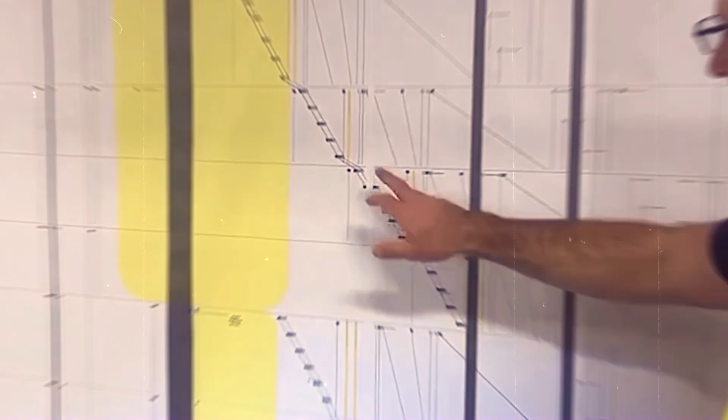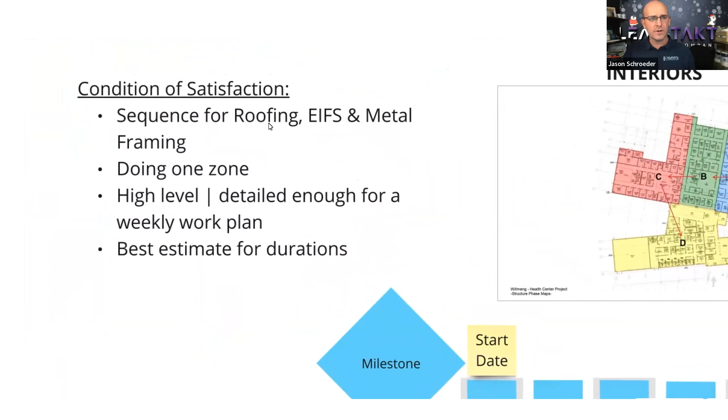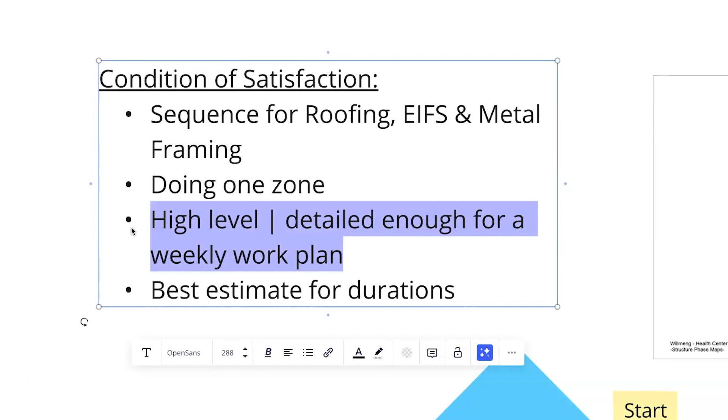Number one, the first thing that we have to do is explain to people on the pull plan, what are the conditions of satisfaction for this pull plan? So we pre-populated this. It looks like we have in here the sequence for the roofing, EIFS, and metal framing. We're going to do one zone. It'll be kind of high level, detailed enough for a weekly work plan, meaning enough for you to detail out your activities. And we want the best estimate for your duration.

So we're going to decide on zoning first. Then we are going to fill out our activities. Then we're going to run a backwards pass. And so these rules are here for us to say, hey, we're all on the same page with how we're going to run this pull plan. So the colors for the pull plan will be the LeanTakt purple, Willmeng blue, roof activities are green, EIFS is orange, and metal framing is the light blue.

Here's how we're going to do the stickies. I'm just going to do duration, activity, and that's all we need for the activities when we do our forward pass. When we do it backwards, I'm then going to ask you, what do you need to have happen out ahead of you for that activity to take place? So as we do the sequence forward, we're just building a sequence. But as we go in the reverse, we're going to make sure that the sequence is filled out based on not just the sequence, but the things that you need to do that activity.

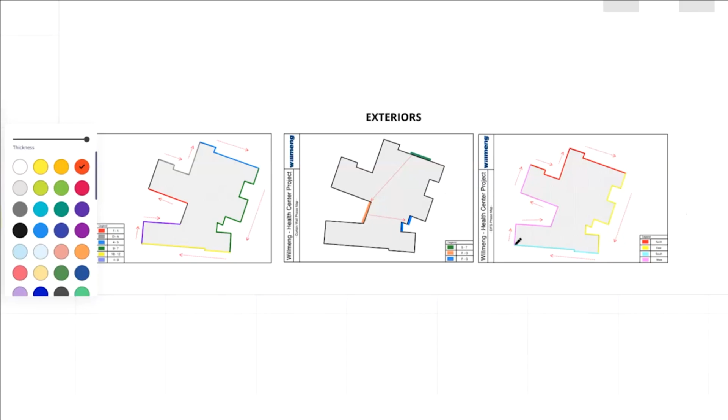We're looking at the EIFS phase map. It looks like we have 4 proposed zones. For the curtain wall, it looks like we have 3. And then for the EIFS, it looks like there's 1, 2, 3, 4, 5, 6. Is that correct? Yes. And then those probably tie together on the takt plan. These 2 zones probably correspond to this one. And these 2 zones down here probably correspond to just this one. And that's how you overlap them with the other work.

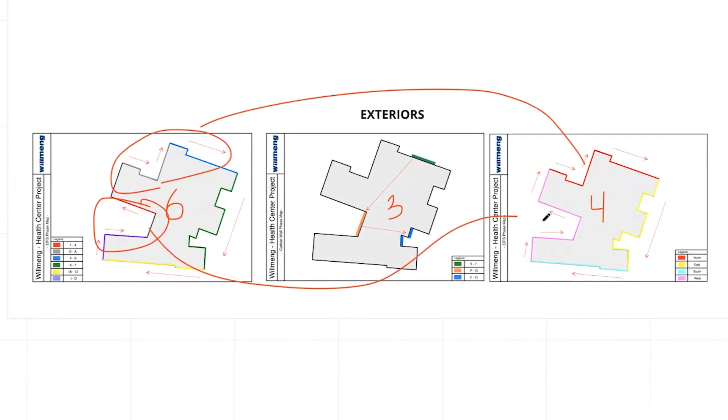All right. And then for the roof, it was broken out into these general areas because of height. So what we need to do is just do a preliminary check. And so I'm going to go one by one on these. So EIFS, this is our first zone for the foundations and structure. This is our second zone generally, and this is our third zone. Our interiors and structures progress is happening in that direction. So based on that, from a preliminary standpoint, I'm assuming, Ricardo, that the red would be the first zone, and then would the yellow be the second one?

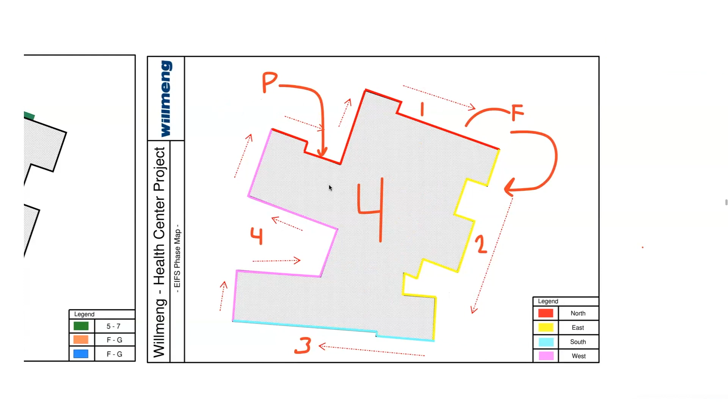Correct, yeah. Third and fourth. What we're saying by zoning is that you would plan, build that zone or that run of exterior, and then finish before you move on to the other zone so that another contractor can come behind you if need be. So all we're asking is, if we broke it out into 4 zones, would that work for you to plan your work, build it while you're there, and finish before you move on to other zones in your work?

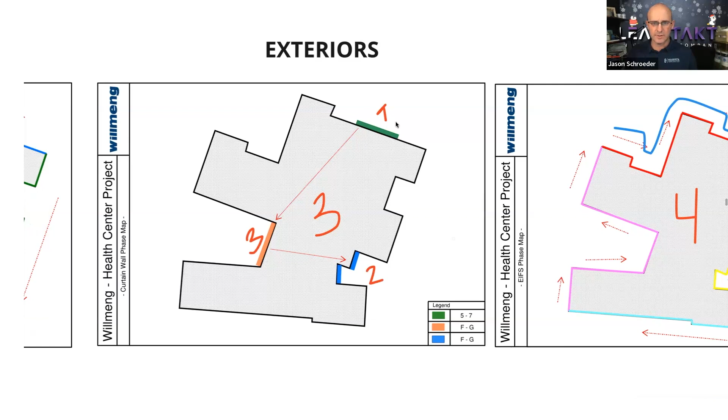Yes, it will work. Everything here in blue, you'd like to scaffold that all at once, is that correct? Yes, if possible. Okay. We're going to frame everything off of lifts and hang everything off of lifts. So you'll be inside. Lifts off the outside. Going over here to curtain wall generally, if I understand this right, it would be the first install, second install, third install as we run around the building. Okay, so we don't need to do this one right now. The smaller the zone sizes we go to, the faster we typically go in the overall schedule. We like to keep options to where we could maybe later on make them a little bit smaller.

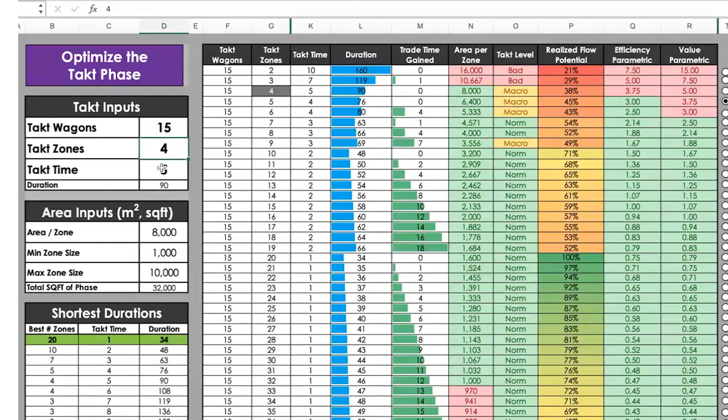This right here is a calculator. Takt wagons over here to the left, you can consider those general activities, like large scopes of activities. Let's say that on the exterior you had 15 major activities and we have 4 zones, and let's just say the general duration for the activity was 5 days. So we have 15 major activities in 4 zones on a takt time of 5. What I want to show everybody just real quick, when you look at the numbers here, what that means.

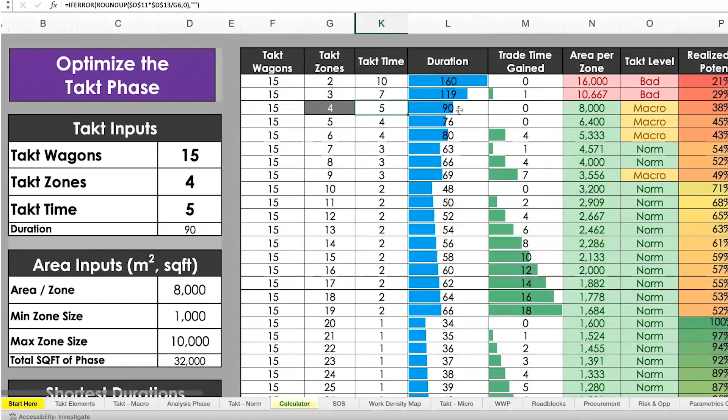If you did have 15 major activities, which we'll find out now, 4 zones on a 5-day takt time, the duration of the exterior install would be 90 days. If you changed it to 6 zones, it would go down to 80. So this column right here calculates the overall duration of what happens if you do different zoning strategies. So I think we'll start the pull plan out at 4 zones, a little bit on the higher end.

And if this project ever gets into trouble and we hit a delay, I'm thinking we could always go to a 6-zone strategy to pick up time. Matt and the LeanTakt team, does that sound okay to you all? Am I heading in the right direction with that?

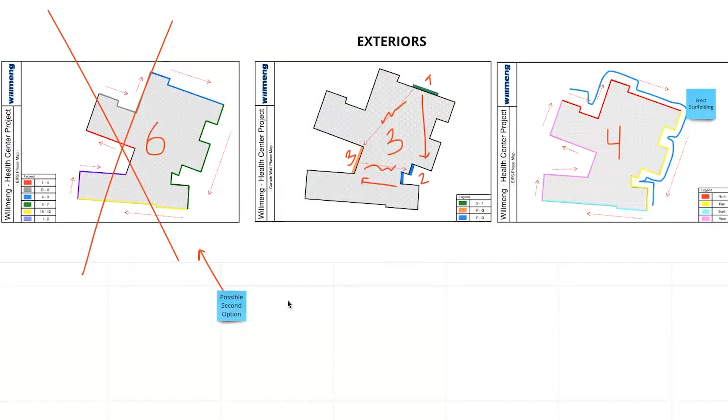I do want to make something clear. This 5-zone strategy is the same amount of work, same labor counts, same material amounts. The only thing that's different is the zone sizes, and the only other thing that's different is that you need materials sooner because you're accomplishing the work sooner.

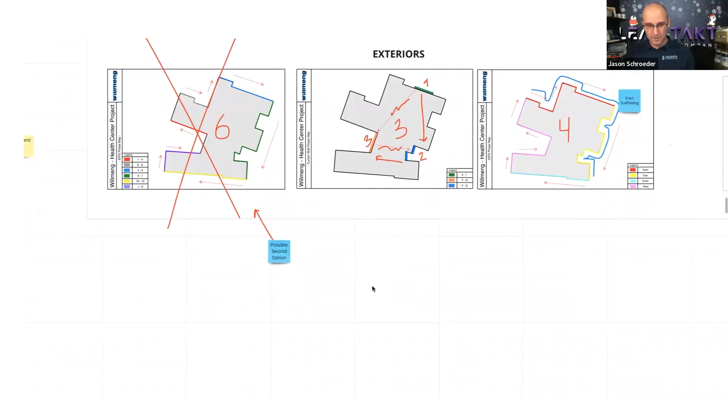Perfect. Wonderful. All we're trying to do with different zoning strategies is have a way to pull the schedule in if we ever need to that does not hurt you. So yeah, that's all we're looking for. My point with this is that I think that the 4-zone strategy could be our default, and then the 6 zones, if we ever needed to, we could go smaller as a backup and recover from a delay.

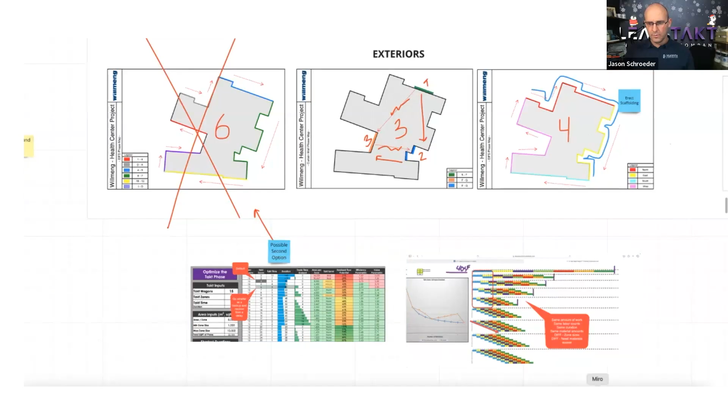When you go back to the calculator, I just wanted to show you what happens here. If I said, hey, let's go ahead and do this 6-zone strategy and hit this button, if you ever wanted to do this and check the general contractor you're working for, this calculator is free on LeanTakt.com. But what you can see here is that if we had 4 zones, this is what the duration would be. And if we go to 6 zones, you'll see what it looks like down here and where we gain those 10 days.

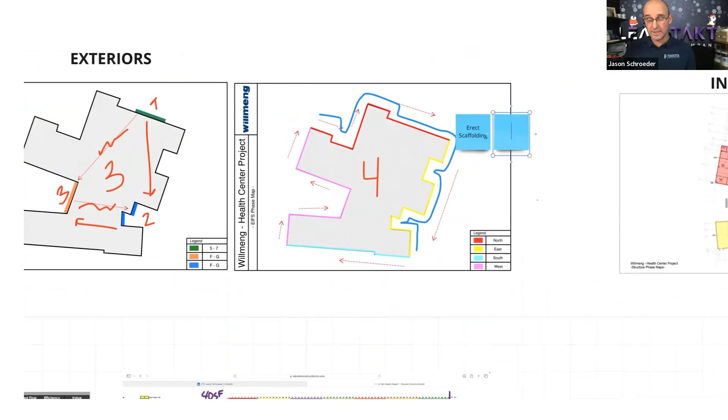Okay, so we're set. We're generally going to do 4 zones and we're going to erect the scaffolding. Let's maybe just get right into the exterior and let's do our pull plans. We are only going to pull plan 1 zone. We're going to come up here and we're going to create a sequence just for the red. And what I'd like to do, just high level, what is the general phasing of trades? Is it framing, sheathing, EIFS?

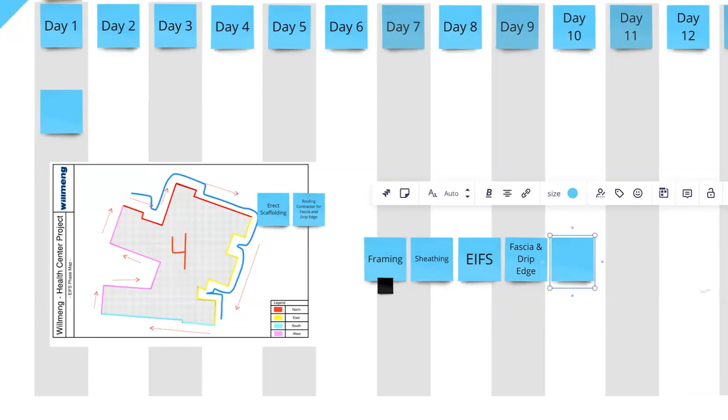The water barrier is a part of the EIFS process, is that correct? Yeah. Then you have fascia, drip edge. And then are there any windows or curtain wall that go in after the EIFS? Yep, they all do. Okay, windows and curtain wall. So this is our general high level sequence. So I'm just going to use this as a guide. All right, well, everybody get ready. We are in our pull plan right now.

For the framer, what do you expect when you get there? I just need all the decking shot down, and any duct openings or anything in the walls laid out before I get there. That's going to be your conditions of satisfaction. All right, once you get there, just for the red zone, what's the first thing you do, boss? Well, I got to lay it out and then shoot down track. Okay, how long does layout take? Oh, it'll probably take me a day or 2 to lay it out.

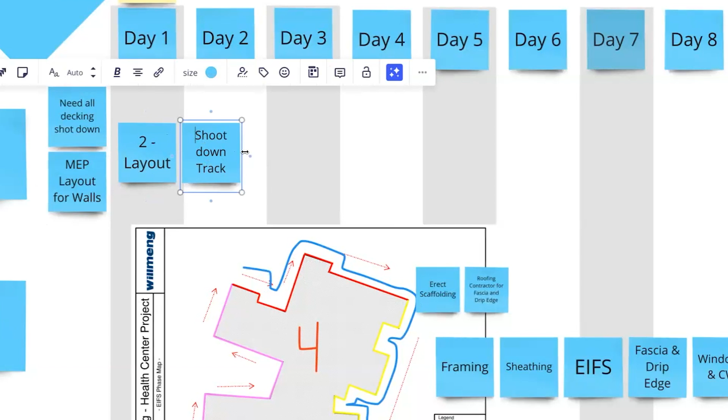Okay, just for the red zone, right? Yeah. And then shoot down track. Is that bottom track and top track? Yes. How many days? Probably 2 days of shooting track and then 6 days of framing. So 10 days total. All right, what happens after framing, team? Sheathing. How long for sheathing, my brother? And is there any overlap? 7 days for that area. So once sheathing's done, EIFS, is that you next? Yes. Tell me what you got.

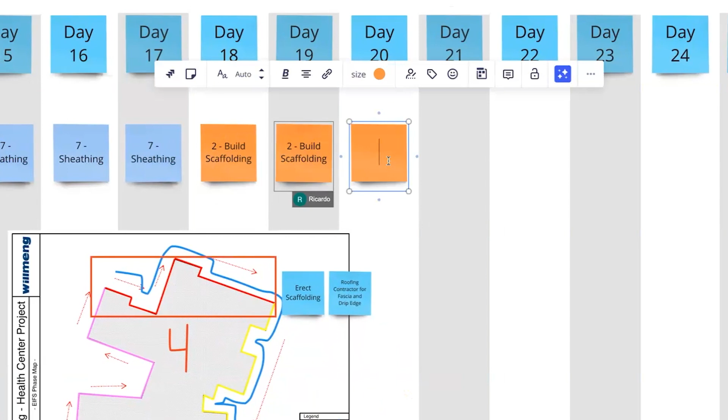What is your first step in your process? Scaffold. It'll take me for that probably 2 days. And then what happens after you build scaffolding? Weather barrier. How many days? 2 days. Envelope testing. Yep. Okay, and maybe it's just an inspection, either one.

And then actually, before I forget, you probably have to do an inspection after framing and sheathing. Is that right, guys? Yep. What happens after your envelope testing and weather barrier? Start sticking foam. All right, how many days for that? I'll say in the elevation 2-3 days. Okay, 3 days. All right, what happens after that?

That's rasping. How many days? 3. Okay, perfect. What happens after that? Base coat, mesh. It's gonna take me 2 days. What happens after that? Color, say 2 days max. Let's go over to the roofing contractor.

So the roofing, give me a roof color, LeanTakt team. How many days do you need to do your fascia and drip edge? For fascia, just that zone, 4 days, 7 days with drip edge. And does it overlap or is it just... Yeah, so we're gonna do about 150 linear feet of fascia, then follow it up with a drip edge.

I'm going to do something here real quick. Is that kind of a representation of what you're doing? Yes. All right, how many days does it take to drop scaffolding? 2 days. A couple days, okay. I'm going to lock all of the background and I'm going to copy this over and look at, is there an ideal rhythm from area to area?

So this is always how pull planning was supposed to go, is we were supposed to make sure that we have the right stagger from zone to zone to zone. So I'm going to do something that might look just a little bit haphazard, and I'm just going to start to look for patterns. So the sequence that we just created, I'm just going to bring out some data. When we do pull plans, in my opinion, it doesn't really matter how well we're flowing left to right, because that doesn't take care of trade partners. I care how are we flowing from area to area to area so that the trade partner has flow.

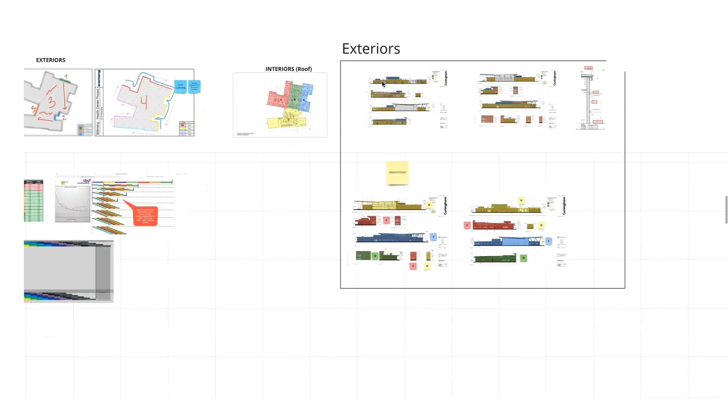Okay, so I'm just going to check a couple of these things off. So we have the EIFS, so I'm putting check marks on anything that we've included in our pull plan. The fascia, a drip edge. What was the thing we just added? Gutters. Go ahead and write that up there up top for me. What about exterior doors? Are we putting that into this pull plan, Matt, or are we doing that later? We're gonna have to do that later. Windows we'll do later. The garage door we'll do later. So Danny, give me a note for doors, windows.

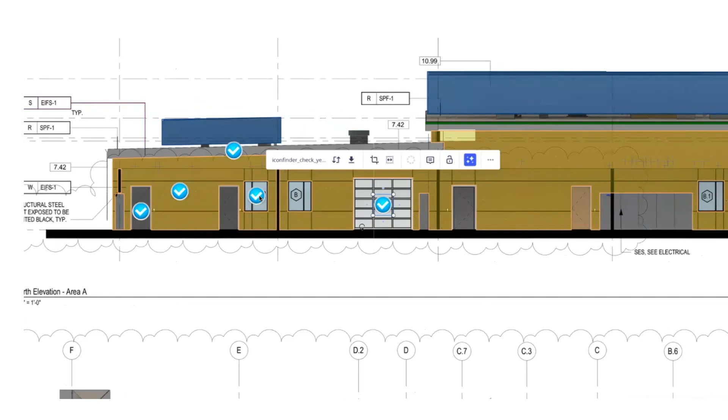Danny, you'll put MEP rough in and cutouts. I'm just looking on the exterior to see if we're missing anything else that's open, or that's probably a curtain wall. We're good. So garage door we'll do later, doors we'll do later, windows we'll do later, MEP. Okay, so we need to put in MEP back here, but we'll get to that. First and foremost, gutters. So it goes fascia, gutter, drip edge. And how long does the gutter take? Just do 5 days. Here's what we need to figure out here. As an overlap, how much can it overlap with fascia?

And then going back over here, you need penetrations complete. Where do the MEP cutouts need to go? When does that happen? Does it happen right after framing or the last 2 days of framing? It needs to happen before the sheathing. Before the sheathing? Okay. Any penetration. Okay, so probably right there. Build scaffolding, we're good. Sheathing, cleanup. So I put an activity in here for the framer for cleanup to take care of this need, substrate clean.

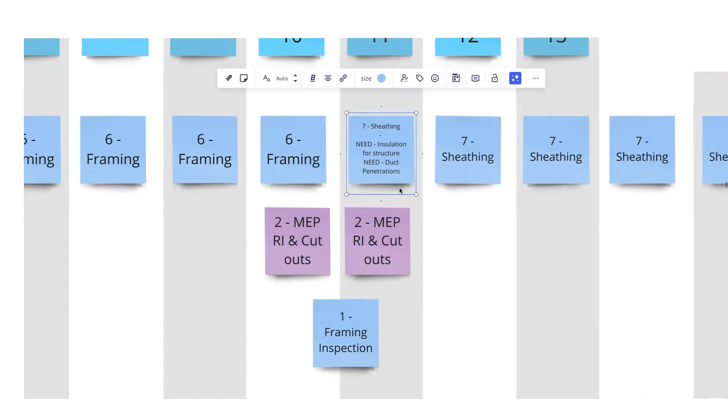For sheathing, what do you need, boss, to be successful? I need all the duct openings and everything framed out, and insulation if there's going to be insulation. Insulation on the structure. There's some insulation needed. Okay, insulation for the structure, and then duct penetrations. All the openings framed in the wall. Okay. All right, so over here, I'm going to put as a predecessor. So we need all decking shot down, MEP layout for walls, and then I'm going to put something else over here that says insulation complete. So I'll put those in here. All right, so that's good. And both of those are picked up now.

The MEP homies aren't in here, but if they need something, we'll address that. And then for framing, it's probably the same thing, but I'm just going to ask you, this is the last thing. To shoot down your track, you'll probably need layout. But is there anything else that you need to do your layout or shoot your track down other than decking, MEP? I need all the concrete or stem walls. Okay. All right. So I'm going to get that right now.

Stem walls. Okay. Team, it looks like we have a decent pull plan and a sequence. Is there any concurrent work that can happen here, or is this all finish-to-start? So here's what I'm saying. It's layout, and then you have shoot down track, and then you have framing, and then you have sheathing. Is that all finish-to-start like it's shown, or do you want any overlap here? Yeah, no, I don't want any overlap right now.

All right, building scaffolding. I'm assuming you can't build the scaffolding until the sheathing is done. So for the EIFS, is there any concurrent work here? Like, is there anything that can go parallel, or is this exactly how you want the sequence? That's exactly the sequence. Okay, perfect. Fascia, gutter, and drip edge. I'm going to ask that same thing to you. Does this work? Yes. All right, well then we're going to copy this down. And we're doing it on a 6-day stagger. Okay, so that's 1, 2, 3, 4, 5, 6. Okay, perfect. All right, I just want to show you how this shakes out.